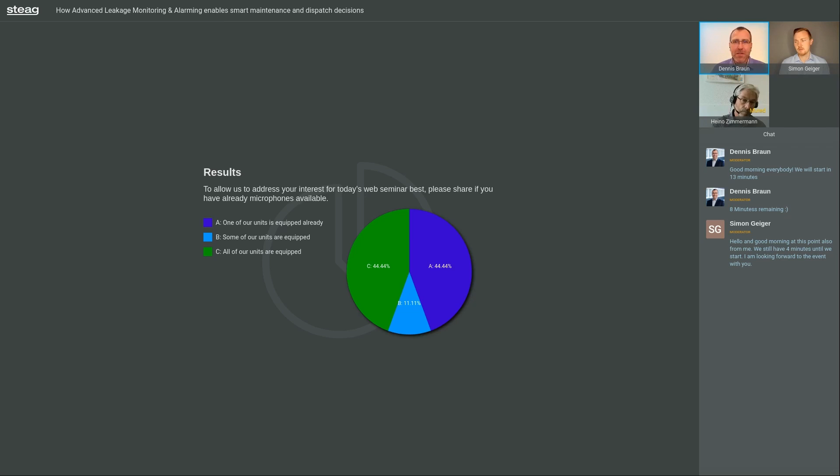So that is really an audience today that is really right in the focus. So let us go. Let us show you quickly what STEAG does, and then Heino can show us exactly what ALMA can do for you.

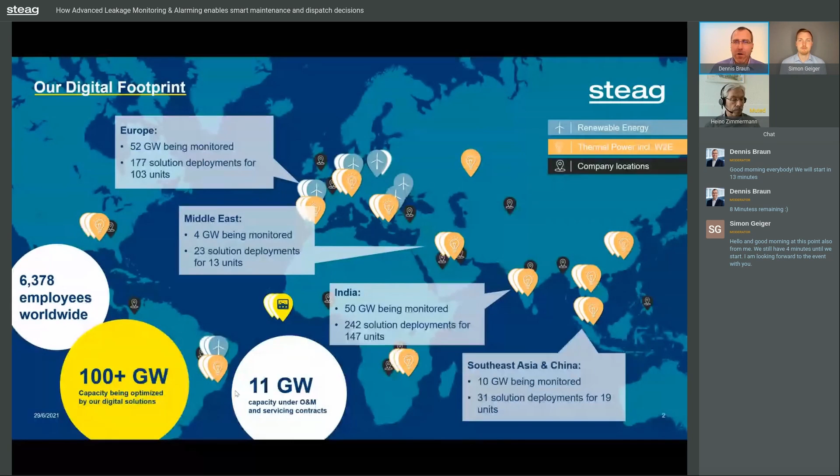Just a couple of numbers here, pretty quick. For example, the boiler cleaning management, which Heino is also responsible for, as we discussed a minute before, more than 66 gigawatts of power plant capacity are using that. Other modules we have are used in total in more than 20 countries around the world. So you see, it's not something new, not something we just invented yesterday. It's really well proven around the globe.

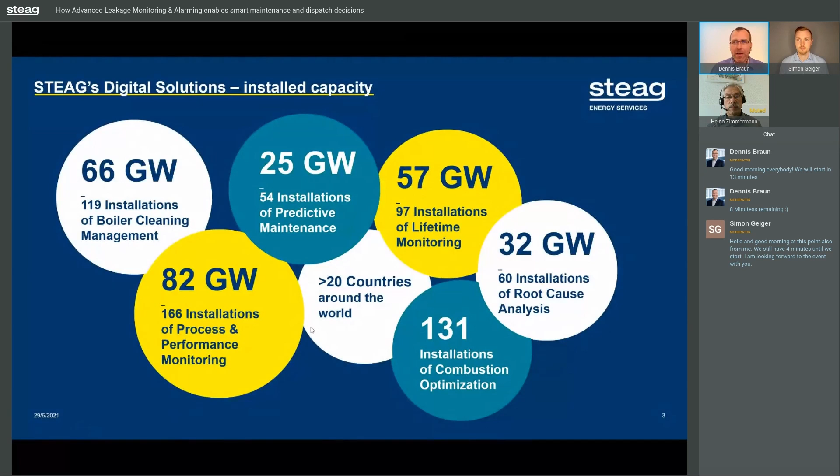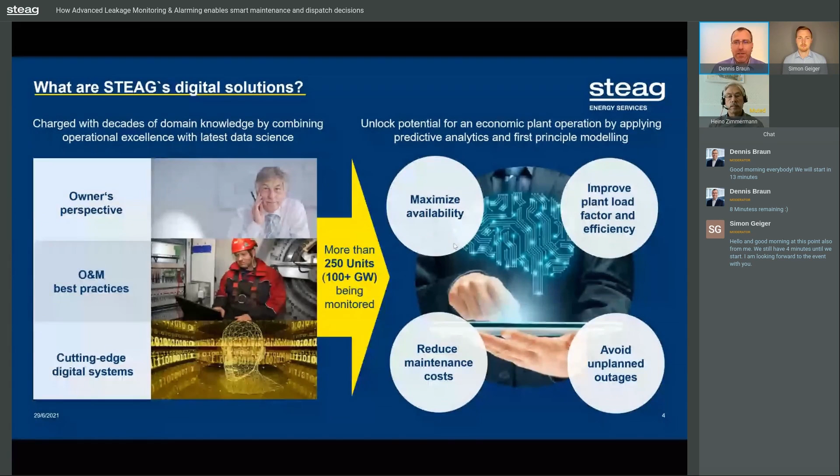So what are those things that I show you here? It's all part of STEAG's asset intelligence framework. So at the bottom, there's a couple of software products.

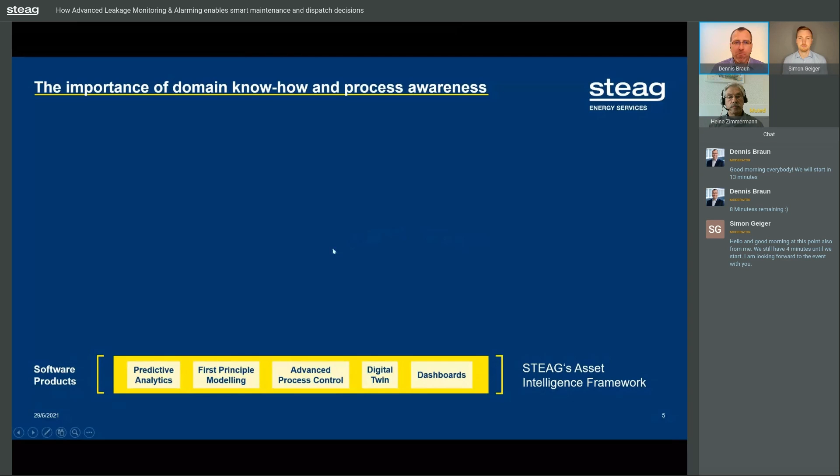We combine that with our and the customer's experience across different applications and different fields, from lifetime monitoring to operation, maintenance, and data science. It's all part of that asset intelligence framework.

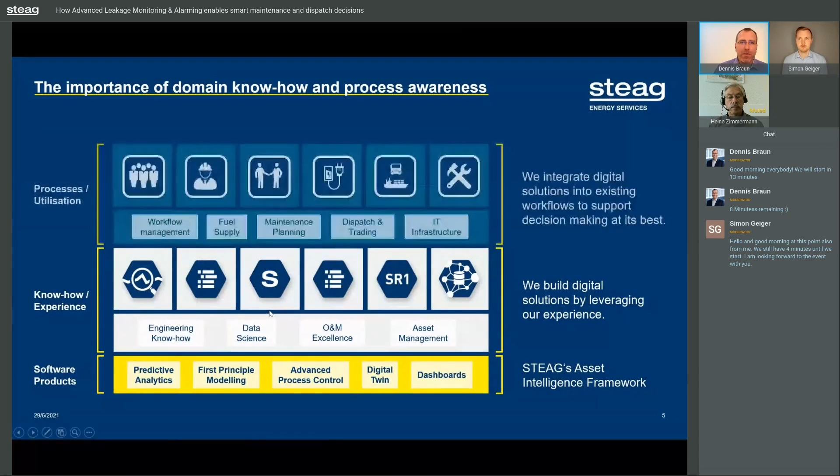But then comes maybe the most important part: to really have the knowledge how to put that into the daily work of our customers and partners, to allow insights to be turned into actions. It's not about a screen that is just showing something. It's about the people on site being able to do the right thing for the highest benefit of the owner and operator.

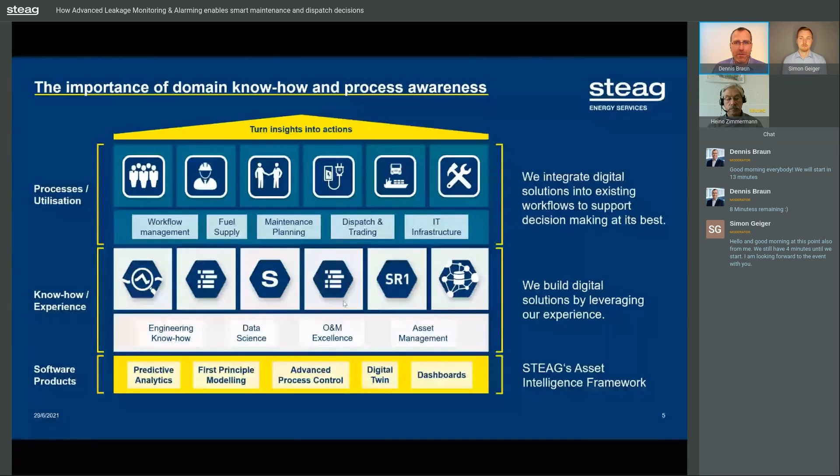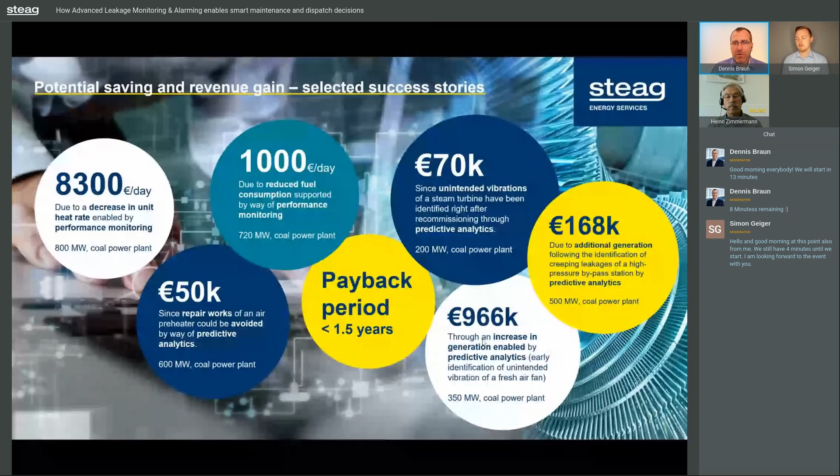Here's an invitation for you. First of all, of course, our next webinars and our Energy Week in November, but also if you today think ALMA sounds good but you're still not sure if it fits your unit, the technology that you apply, you are invited to contact Heino, Simon, or me, and we can later see with your data, with your question, if that fits—and many times it does. I think it's really worth having a private meeting afterwards online to find out if it makes sense for you and helps you have those benefits that many other customers already use.

Before we finish this introduction, I'd like to share only 2 slides to quickly show what ALMA is. The abbreviation stands for Advanced Leakage Monitoring and Alerting. It's an IT solution for detecting leakages in the steam generator, a system that gives early and reliable notification to operators that something is wrong. It's an add-on to acoustic sensor systems, and it connects via an interface to those other systems, as we will see with Heino soon. It's able to detect leakages first.

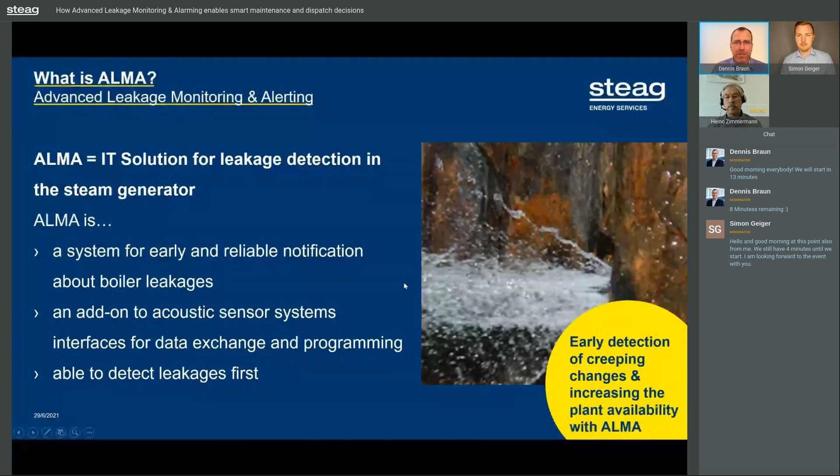Of course, there are different possibilities to detect leakages, and Heino will go into those details soon. But for us, it's important to give early and reliable information that something is wrong. We see here the pipe water coming out, for those who haven't seen that or don't have a feeling for what I mean. So this is one example to show you what this knowledge can do for you, and then my part is over and Heino can take over.

We talk about this—yes, please. Dennis, please, can I interrupt you for a short second? There are some questions coming about problems with people not being able to hear us. Maybe you can give me or us short feedback in the chat if you can hear us at the moment or if you have problems.

Please let me know. I also recommend doing a refresh, F5, on your browser. I can see on one client it's all fine; on the other, I still don't have the slides coming through, so I'll refresh here too. You can also copy the URL from the top of your screen, reopen your browser, and jump right back in—that should also help. But it's good that you let us know if something's wrong. I think that's very nice.

It's only browser-based here, but on the other hand, a full software installation is sometimes a little more stable. Since we have power plant customers, in many cases local installations are typically not possible for our audience, so we went for something completely without any software installation. Good, let me also refresh here. Let me get my mouse. Good.

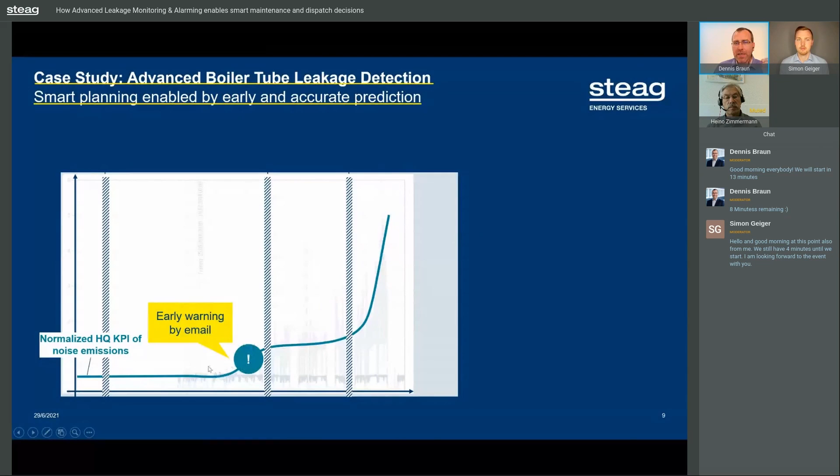The leakage starts pretty small, and it's very difficult to detect. But in this case, our ALMA, since it's so precise, gives a warning with an email, so you are aware. So you focus, you check how bad it is. And since the leakage is not so bad, repairs can be postponed.

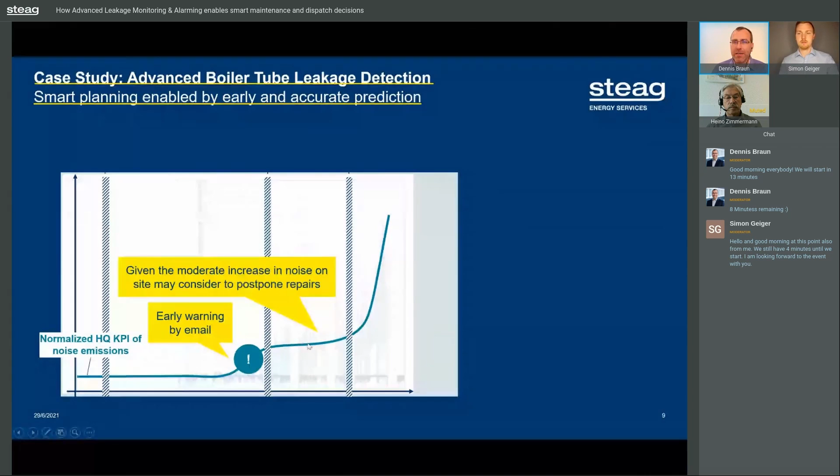You didn't make it here for the first standstill, it was too short notice, but you can go maybe like a week of time here. You can go a couple of days keeping an eye on the issue, but it's not a problem yet. So you schedule maintenance, and here it breaks, and here those consequential damages were avoided since you have the knowledge and you can fix it before with a planned standstill.

What that means in detail we will see with Heino, but that is just the big message here. You can use that knowledge to avoid unplanned outages, and that's very valuable. And you saw those numbers, what that could mean easily - lots of money. So that is very helpful. Good, so that was my quick overview.

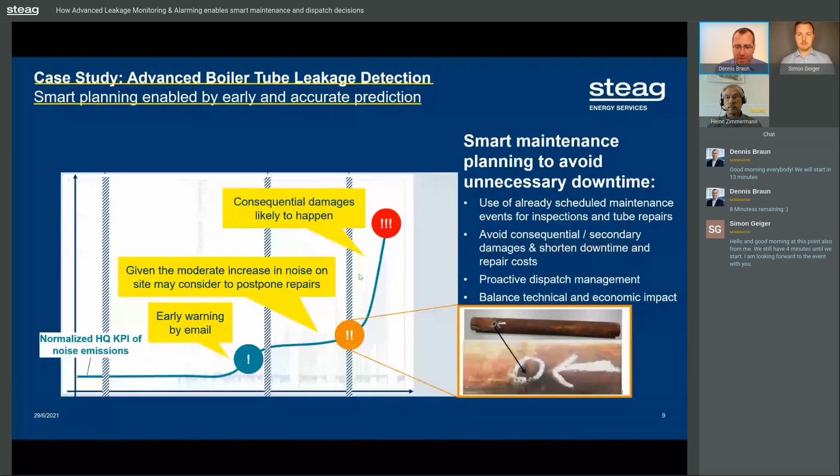Good, so Simon, Heino, was there anything to add? Oh, I hear somebody cannot hear me. It's really problematic today. Okay, maybe Heino will take over. I will push F5 here, and hopefully everything is better then. So let's continue with the next part. Heino, the stage is yours.

Thank you very much for your good introduction. I hope my sound is good, and I will start sharing my screen. If everything is set up right, then I'll start with my presentation. It's about ALMA, as Dennis already introduced, and I will talk a little bit about boiler leakage in general to provide some background, and then I will explain how ALMA works and how early detection is implemented. At the end, I will give a few examples, and we can have a look at a real ALMA system, what it looks like, and how to use it.

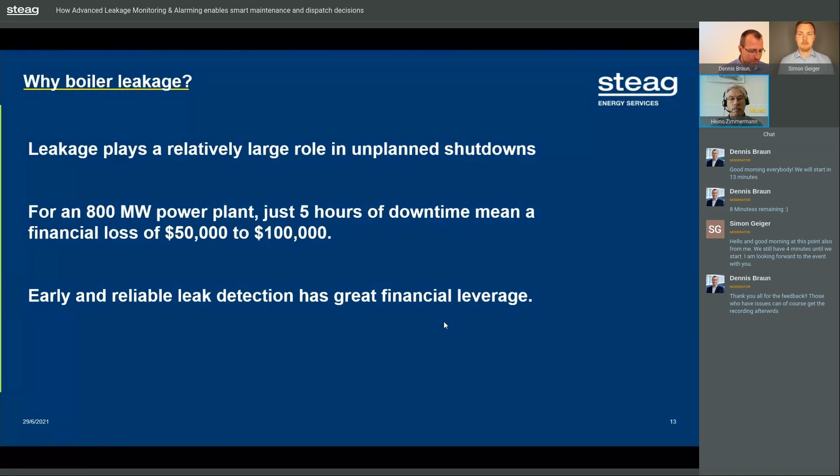Leakages and unplanned shutdowns are pretty expensive. Just an example of an 800 megawatt power plant: just 5 hours of downtime means financial loss of about $50,000 up to $100,000, and I'm sure that is the lower part of the range of the cost. Because of this high financial loss from downtime, early and reliable leak detection would have a great financial leverage. If we get a way to detect leaks very early after they come up, we would get a lot of time to react, to plan the maintenance and repair, and save a lot of money.

We should have a look at the causes of boiler tube leakages, because if we want to detect something, we should know how it occurs, how it works. Erosion is a big topic with tube leakages. It mainly comes from soot blowing and from the ashes in the coal that erode the tubes in the boiler in the flue gas path. Thermal stress also plays a role. During startup and shutdown, there are big temperature gradients, and those cause stress on the tubes, and mainly weldings get stressed.

Weldings tend to break during shutdown or startup. Chemical corrosion also occurs when there's a lack of O2 close to the burners. Then CO corrosion can affect the furnace walls and cause damage.

And last, and perhaps the most important cause for leakages, are leakages. That's not a mistake - it is the fact that many leakages cause secondary or subsequent leakages. You can imagine steam or water under high pressure getting out of a small leak or hole can cut neighboring tubes, and this is what we call secondary leakages. This is a big issue, and these secondary leakages of course grow and get worse the more time it takes from the start of the leak until shutdown for repairing it.

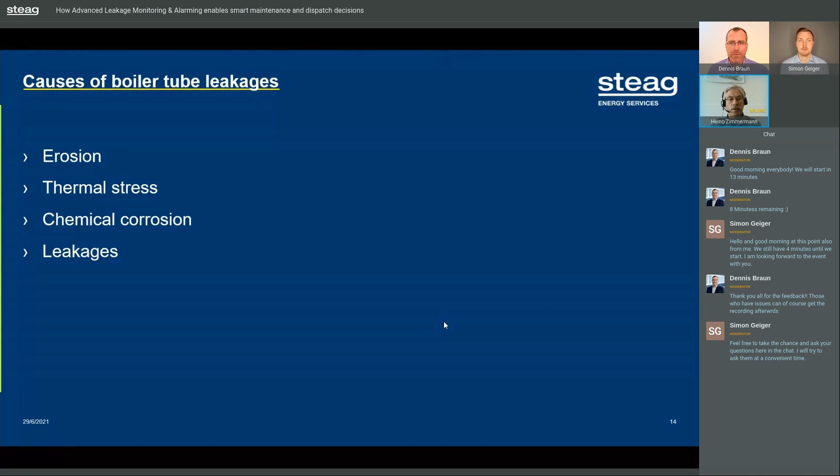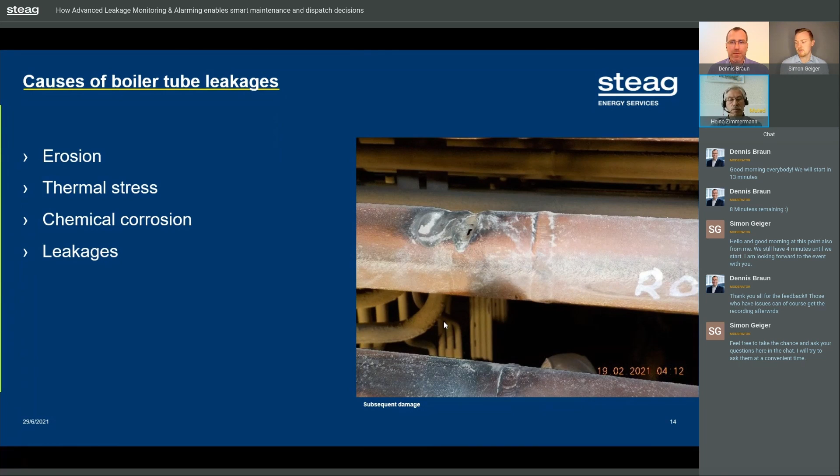Maybe that's a good moment to ask the audience a question, since we prepared exactly that. How many leakages do you have per year? Those that know, give us a feeling. Very often, very rare, not at all, more than 10? Okay, I will share the results. Thank you all. Wow, no one, good. Maybe another question to finish here so we don't interrupt again soon.

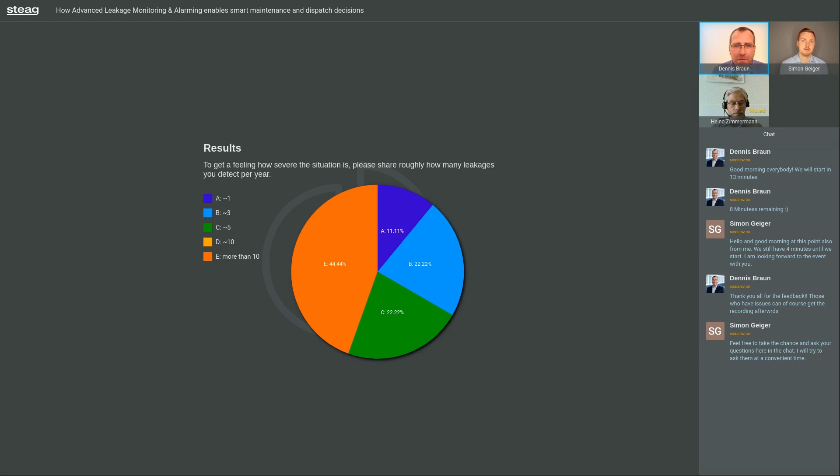I'm done, thank you for the confirmation of all the participants. It's very interesting to learn how frequent secondary leakages are, and also how many microphones are installed. That's very interesting for me, so thank you for that.

So we stopped at the causes of boiler tube leakages, and of course the question is how to reduce loss caused by the leakages. There are two approaches. The first is to avoid leakages at all, and the second is, if there is a leak, to reduce the cost of that leakage. Avoiding leakages is possible by optimized soot blowing, so less soot blowing, and only where it's really necessary due to fouling or slagging on a heating surface, which will reduce the erosion caused by the steam and by ashes moving upstream through the boiler.

The second approach, addressing CO corrosion, can be combustion optimization by leading the combustion air in a better way to avoid this CO corrosion. Heino, I think it's worth mentioning we can provide that as well, right? This is not part of the ALMA package, but it's part of what we do, so if somebody has a problem there, they can reach out and we can have a project or discussion about that with them as well.

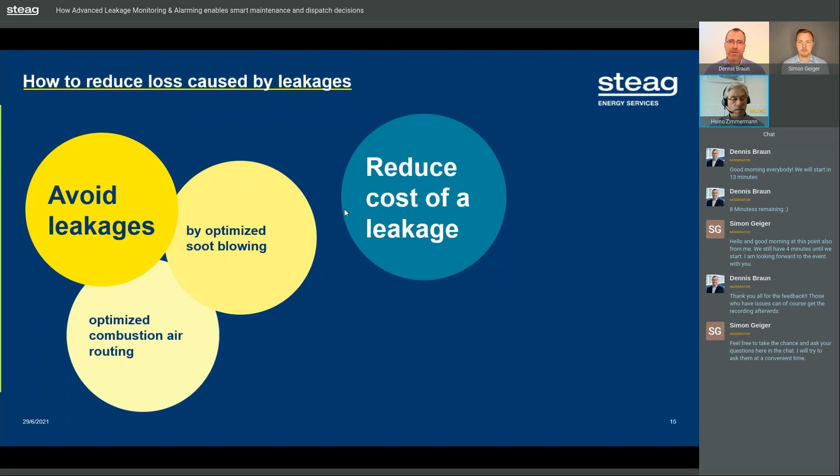Both topics are pretty interesting, but today we don't have time to address everything regarding leakage. So we will focus on early detection and reliable alerts to reduce the cost of an existing leak, and one task is to avoid subsequent damages. In the case of slowly growing leaks, we can even convert an unplanned shutdown into a planned one. As you mentioned, Dennis, in your introduction, if you can avoid an unplanned shutdown of one, two, or three days, you can save a huge amount of money, and each system would be paid back with this one avoided shutdown.

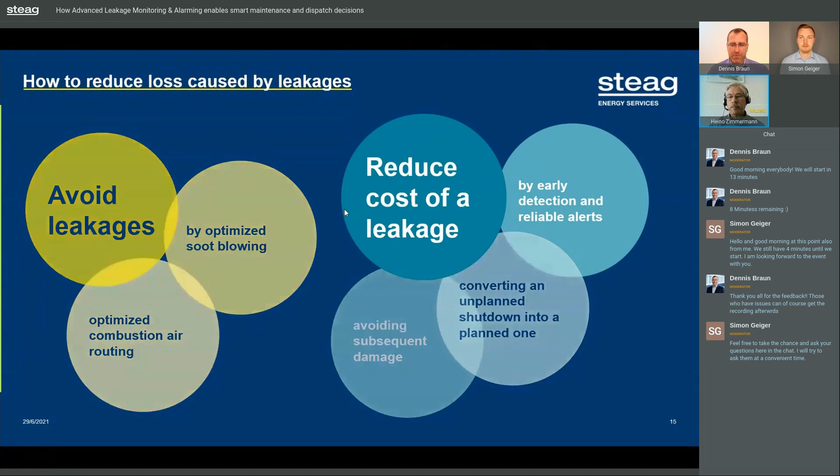So early detection, reliable alerts is our topic today. Let us go into detail on how leaks are detected today. There are some measurements in a plant with respect to water flow and steam flow that typically are used to detect leakages. The most important is the mass flow balance of water and steam. If we compare the feed water entering the boiler and the amount of steam leaving the boiler, an increasing difference is an indication of a leakage.

The same applies to the deaerator level. If there's a leak in the water-steam cycle, the water level will go down and the makeup water flow will increase to refill and replace that missing amount of water. These approaches do not apply to all leaks. For example, in the superheated steam area, this mass flow balance of feed water and live steam does not apply, and these criteria are pretty inaccurate.

Once you see a difference in the mass flow balance of water and steam, the leak is already pretty big and it's very urgent to act. So there's no early warning if you just watch these water-steam data. Similar data are available in the flue gas path. If water or steam enters the flue gas in the boiler, the flue gas temperature is affected, and furnace pressure can change, but these indicators are also pretty inaccurate and come very late if a leak has made big progress.

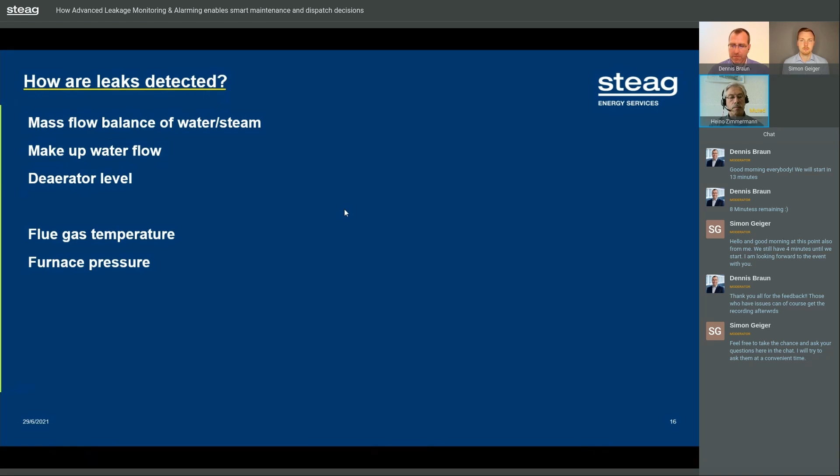The best we have today are acoustic sensors, microphones that listen to the noise in the boiler. If there's steam passing through a tiny hole, or high pressure water passing through a tiny hole, that makes a lot of noise. The microphones used as acoustic sensors are listening into the boiler and detecting any kind of noise.

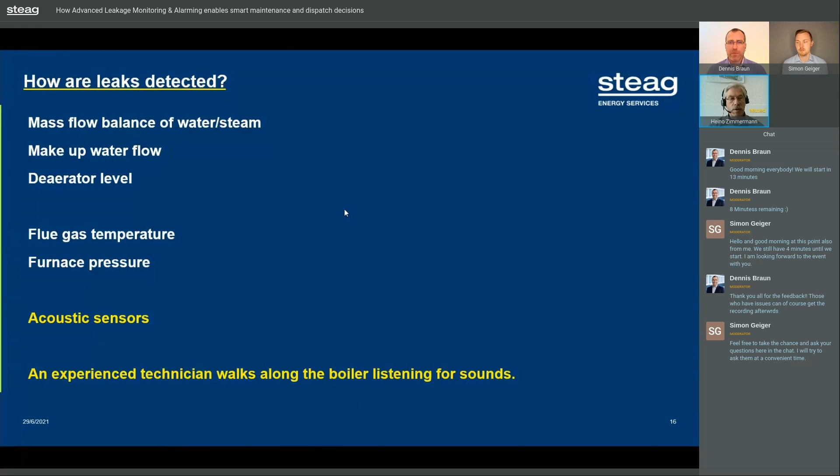And last but not least, of course, the experienced technician who walks along the boiler listening for sounds is the most reliable source, unless you have ALMA. But ALMA is on duty 24/7, and I hope that most people don't have to work that much.

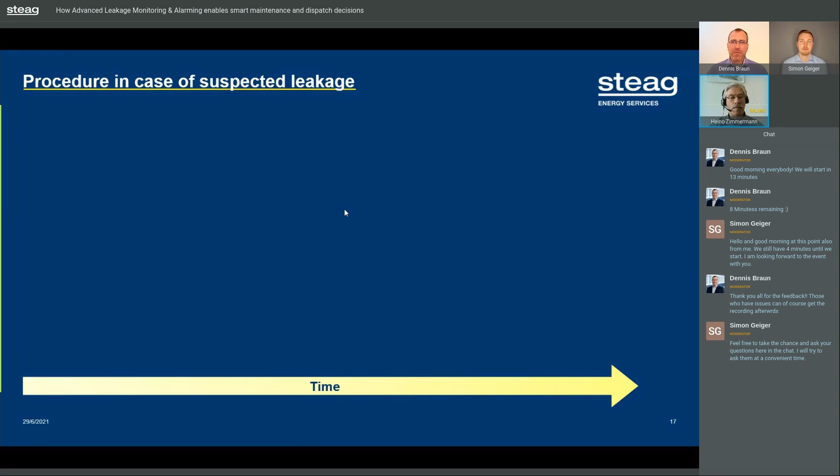So the goal is to early detect and to reliably detect, so we want to save time. That's why we now have a look at the process and the time axis, what is going on if there's a leak. When a leakage starts or begins, some time passes until it is noticed, or until the first suspicion about a leak arises. During this time, the leak can grow and can already start cutting neighboring tubes.

So once there is a suspicion about a leak, a cross-check is typically necessary. Other data are taken into account and discussions in the control room start whether that indication of a leak is pointing to a real leak or some false alarm, and maybe finally some operator is sent to the boiler to go by himself and listen. And all this should lead to the decision whether to shut down the boiler or not. This is the most important decision, and because it is very costly, it has to be taken carefully.

ALMA addresses both phases: from the beginning of the leakage until the first suspicion, this is the early alarming part, and the second phase, cross-checking the suspicion, is the part that ALMA covers with respect to reliable alarming. The more reliable my first suspicion is, the shorter the time can be until I can shut down the boiler.

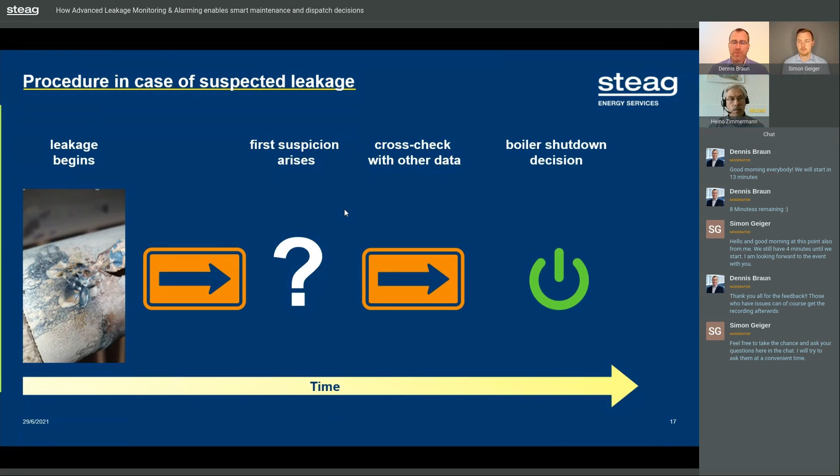So there are acoustic sensor systems installed, many of them, as we learned in the survey here. Let me give a few explanations of how these systems work for those who don't have it installed.

There are microphones, sound sensors installed outside the boiler because they are sensitive to high temperatures, and they listen, as I explained, to the noise in the boiler, either through the air—there's a tiny tube leading into the boiler so the microphone can directly get the sound from inside—or there are sensors getting the sound emitted by the structure of the boiler, especially in the section of water walls where we don't want to penetrate the wall. These structure-borne sensors are installed. Typically, up to 30 sound sensors are installed in a boiler.

Then there's some cabling to connect everything with an evaluation computer, and this evaluation computer brings together all the signals and performs some kind of evaluation, filtering, and so on. On the right, we see an example of such an output, and what we see is some red areas, some yellow hints, some green, and some blue. All of it is connected to a constant alarming level.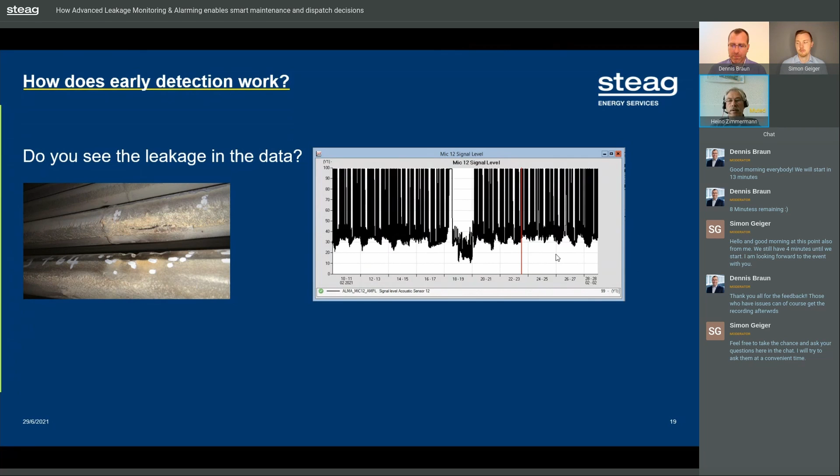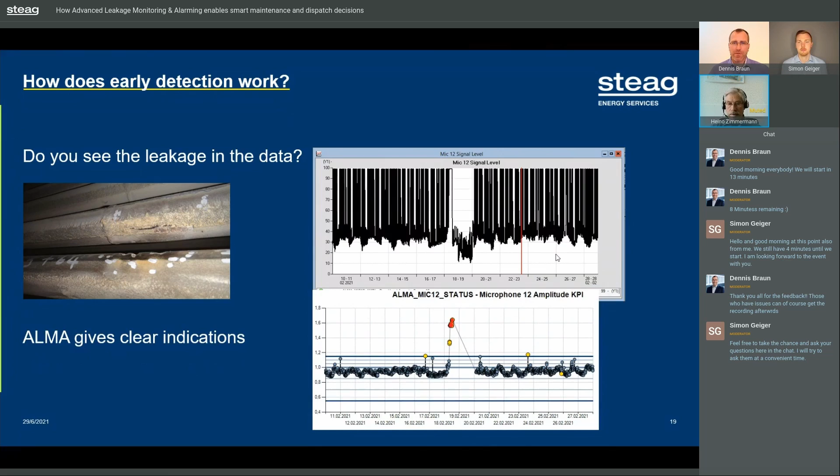But there's a way, of course. ALMA can process this data to give clear indications based on this scattered signal. And this processing of data we call advanced analytics. Now I'll explain how that works.

We apply it in the online system, in the ALMA system, and the first step during the online evaluation is to compare the current actual values of each individual microphone with its respective expected values. The light blue lines on the right screen are the actual data, and the dark blue is coming from the neural network. For that current operation mode, we expect some different noise. It's a first indication, but you see there's still much scattering and fluctuation, and the quality is not much better than before.

Next step will be normalizing the data by calculating the ratio of the actual value and the expected value. The result is an indicator, a performance indicator as it's called in data science, which is around 1. If the value is exactly 1, the actual behavior matches the expected value perfectly. If it's different from 1, there's some deviation. What we get by this normalized data is an independence from load, from mill combination, and so on. So it's a first step to generalize the data.

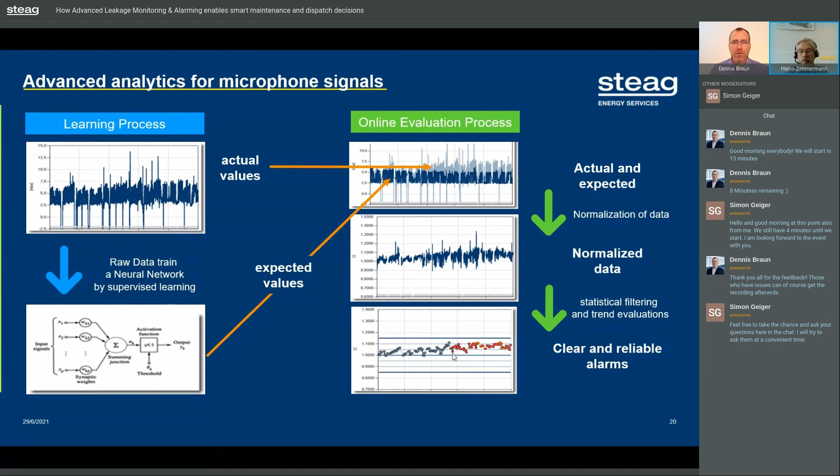Let me give one example from... well, I just read that some people are having issues today. I'm not sure what's wrong. I think there were a couple of updates to the system we are using here two weeks ago. Those that are still here hopefully have no problems. If anything, refresh or even restart your browser. Those that get kicked out for any reason, we will make sure to distribute the recording soon. If you have more questions you cannot ask today, send us an email and we will include that afterwards. So some people say everything's fine, others say they cannot reconnect, which is strange. I will make sure to talk to the company afterwards to find out what's wrong today. That's a pity, but we will be available for later questions and feedback. Some say everything's fine and others cannot reconnect. That is crazy, but we are good.

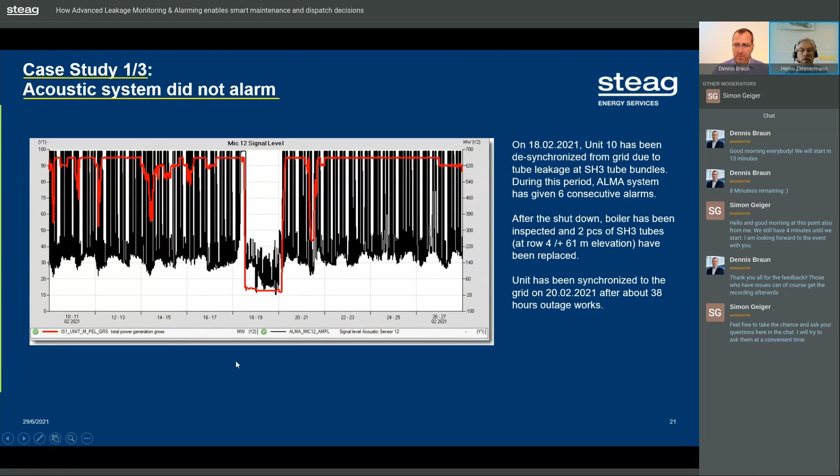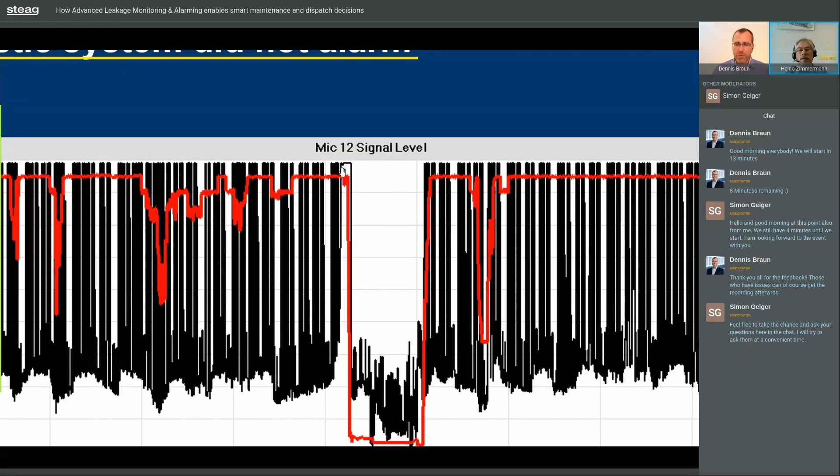Here we see a violent leak, and the red line is the power generation of that unit we have a look at, and we see the shutdown in the center. The characteristics are very difficult to analyze. Let me have a closer look. Only thing we can see here is this area, where the signal is a little bit different. We can see here that the leak started on the left corner of that bar.

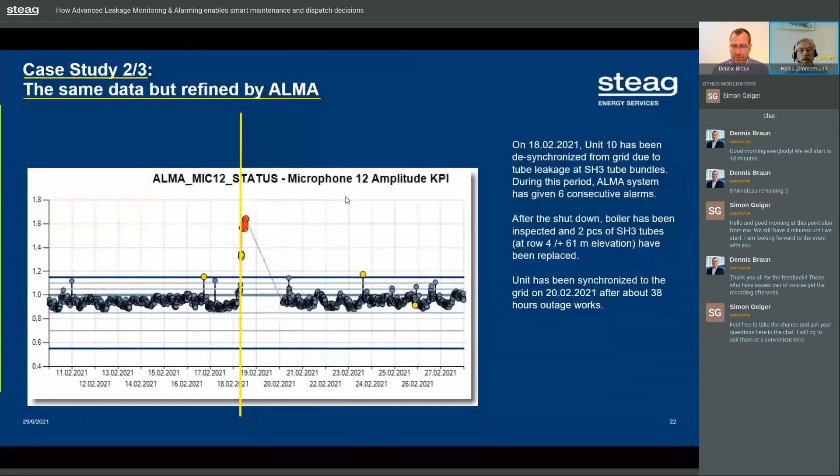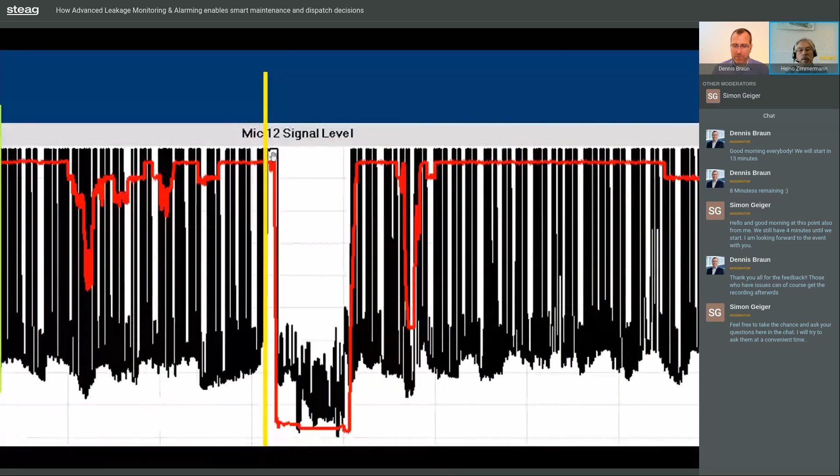That's the same event, same data, just processed by ALMA, and you already saw this, and we see the clear indication. If we compare the point in time of ALMA's first alert and the leakage, we can see that it was at the very beginning of that period where we have that loud noise. So that's the earliest point in time where a violent leak can be detected.

On the right, we have some comment from the operator about this leakage. What I would like to mention is it took about 38 hours to repair this leak. That's a good job, considering that you have to cool down the boiler, find the leak, cut the tubes and weld new tubes. But it is 38 hours, and if you remember the financial loss of a few hours, then this 38 hours...

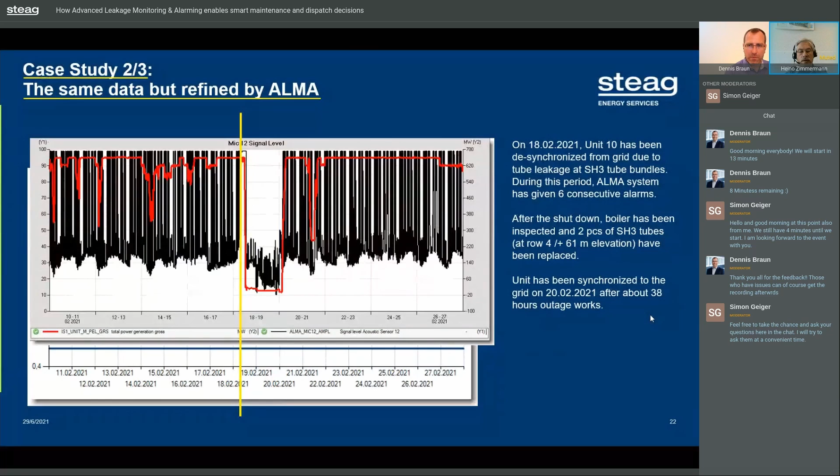Represents 300, 400, 500,000 US dollars of financial loss. And I think you can agree, if we can shorten these downtimes by avoiding secondary leaks and subsequent leaks, only one or two times a year, only a few hours, then we would be able to save a lot of money.

The operators, of course, do not have to monitor these ugly trends of the sound signals or ALMA status signals all the time. They get an email notification each time one microphone changes its state to an alert state. This email can be sent to different groups of recipients - technicians, performance engineers, operators, as the process in the plant requires - and it contains the most important information to make the first decisions. There are four diagrams included. I will show it when we are on the demo system, and it is the basis for the first decisions.

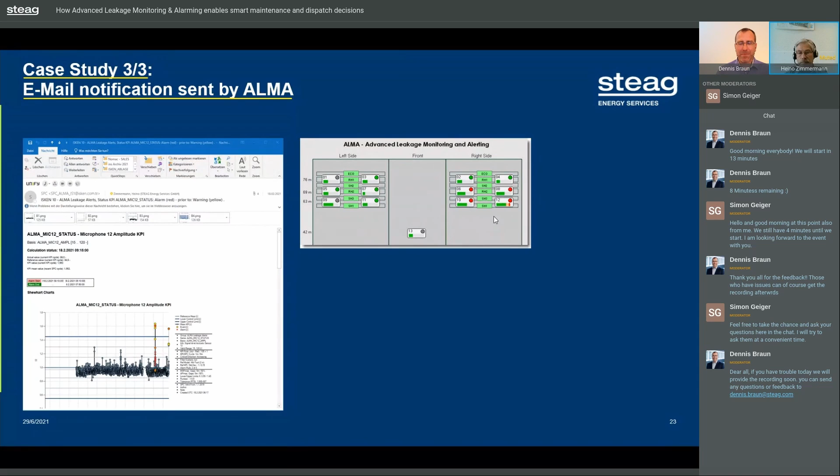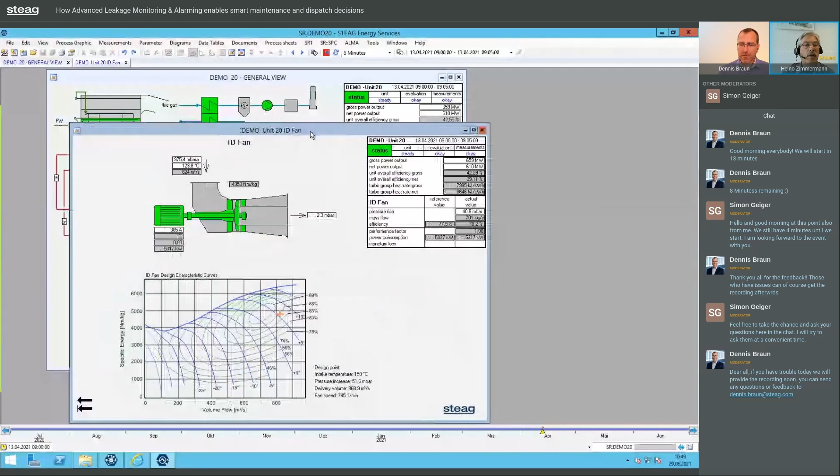Here it is, hope you can see it all. We see the visualization of our system, and we've used this same visualization for our performance monitoring, for our optimized soot blowing. It is a view on our data historian that keeps measurement data. We show it in white fields, and calculation results are in gray fields of our modules installed. You can go into detail with other screens, you can open diagrams, so it is perfect for later analysis of events and of things that happen.

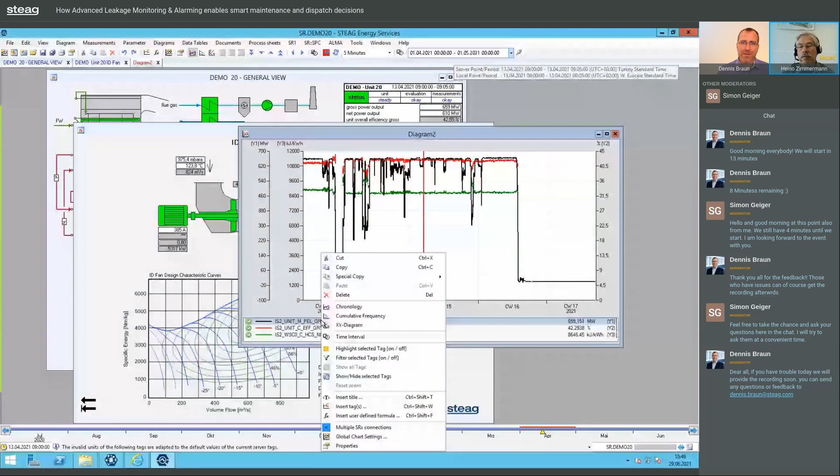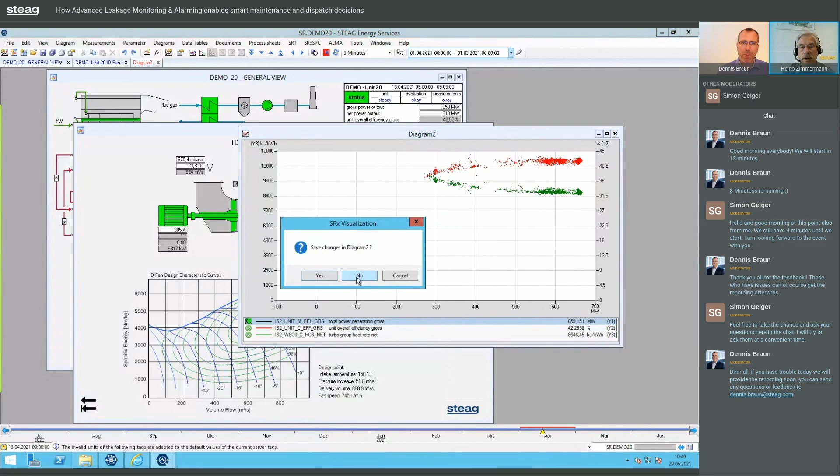Just let me put some data in it. I want to see one month of data, and I can examine data, for example, trends of characteristic curves and so on, very easily, very quickly. Okay, but this is not ALMA, so let's remove it.

For ALMA there's a separate view. This is an overview of all the sensors installed. In this case we have 14 microphones in the boiler. We see the location where it is, and we see the heating surfaces to have an orientation. And we already mentioned soot blowing - if a soot blowing is going on, then that specific heating surface is marked in blue color.

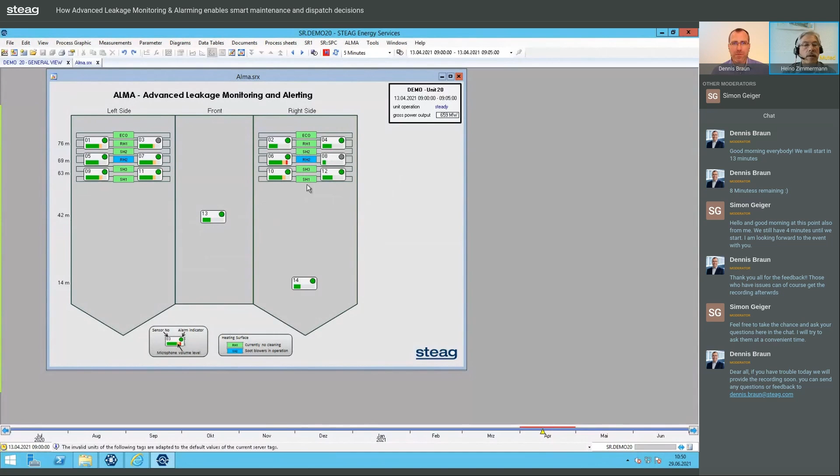And the example I want to show you happened in December, so I switch to data from December. Speed up a little bit right now before Dennis gets too nervous. It's very kind of you, Heino. No problem, no problem. So we see red, the generator output, and in black, one microphone's raw signal.

I want to show you this shutdown, this maintenance shutdown, repair shutdown, at the beginning of December last year. So let's go more into detail. One week, we see here it is shut down, and right before the boiler was shut down, we see a lot of red dots, which means different alarms by ALMA. We see this bar representing the volume of the microphone sensor at very high values in different areas of the boiler. So this is a clear indication of a big leak right now.

If we have a look at the noise level, we see a slow increase at this microphone number 12. We see the alarm started maybe one day. So we have one week here on the time axis, one day before it got really urgent and the boiler was shut down. But this is only one microphone.

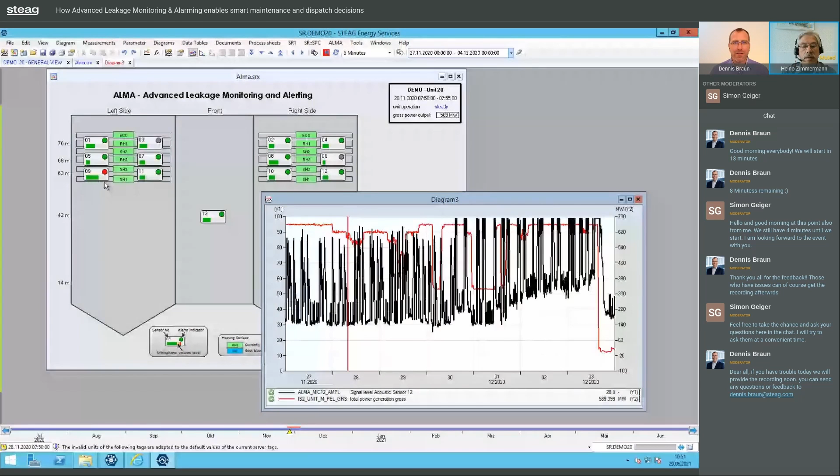Let's go back in time, six days back. Still one sensor is giving an alert. And what I want to do is add the signal of this microphone.

And what we see, up to the 27th of November we had a regular pattern, so to speak, and starting on the 27th, slowly increasing in the lower limit of the volume. On the 27th, late night, the first alarm was given by this sensor. And if you check, here we have the shutdown - it was six days before the shutdown happened.

So the operator had a lot of time to prepare and to evaluate, because he noticed, okay, it's a slow increasing leakage, I have some time, I try to plan my shutdown. He tried to plan, but he waited too long in this case, because he wanted to reach the following weekend, but that did not work. But at least he had enough time to schedule all the work, to prepare the material, and to shorten that outage a lot.

And Heino, you said it's difficult to make this decision whether to shut down or not. I think if you provide even to your management this kind of a graph and say, well, that was last time, this is this time, that's why I propose it, I think everybody should have much more confidence in this kind of request to shut down or try to go on, right? Correct, that's a good point. Confidence is very important, and confidence grows with each leak that ALMA detects. So when it's the first detection of ALMA, you are very, very careful with your decision, but over time you will build up trust into the system and learn how to interpret all the data.

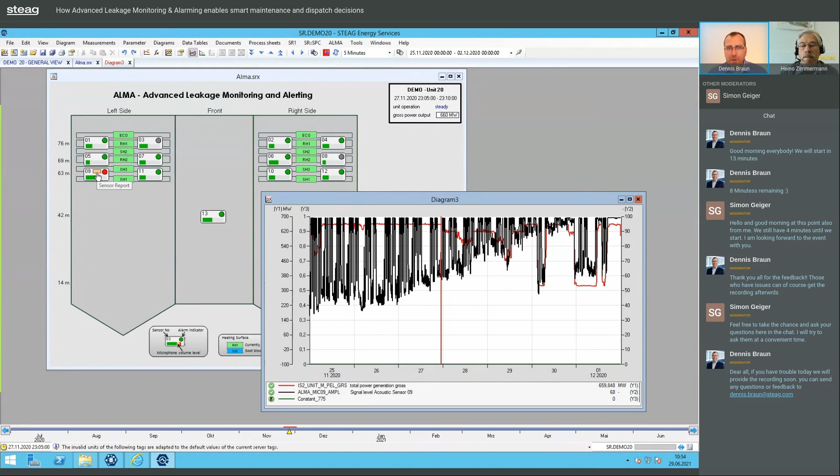Of course. The knowledge we collected over the past years in leakage detection is part of the engineering when we set up the system, and when we help to calibrate, repair, and work on the microphone sensors. Once this is done and the system is online, we are ready on a regular basis to review the system and give hints. And if the customer has a question, we are available all the time for this. You could, like we are right now, share the screen together, have a look together, and really exchange the knowledge that the customer has about the plant, that you have about the system.

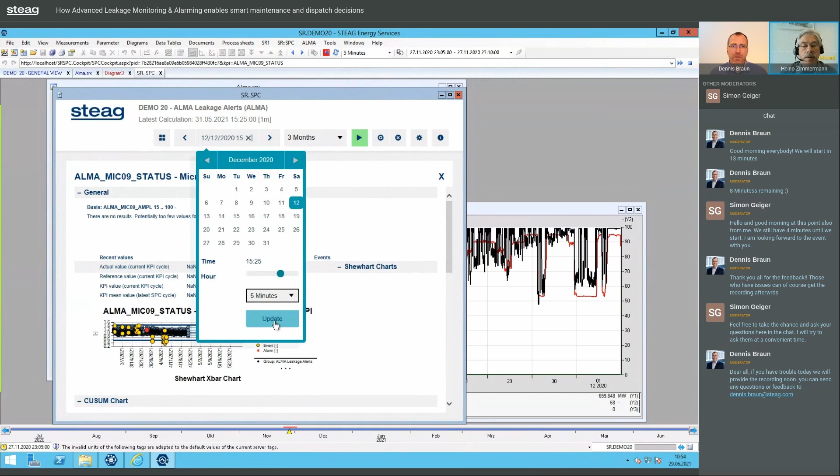I think this kind of confidence is the most relevant part, maybe, of the whole effort here. Yeah, correct. I would like to share another view similar to the view that is covered in the emails.

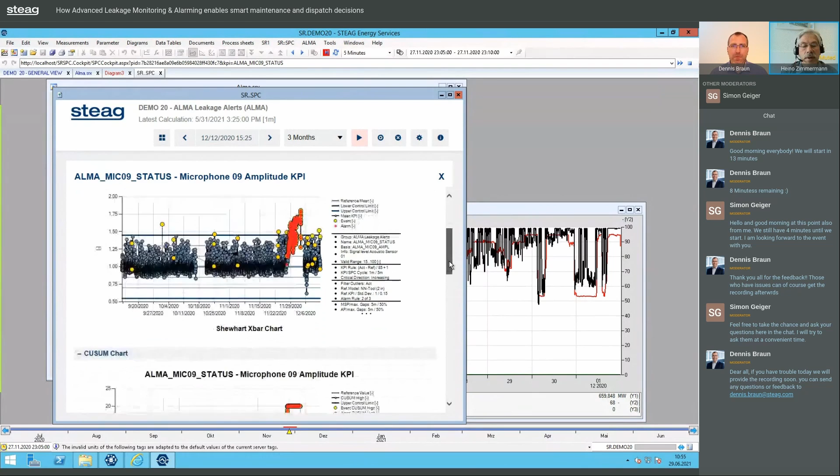So we have this clear indication when something turns red, then we have an alert. This is the 27th. Of course the customer gets this information when the first alert happens, not like here when 7 days have passed. So some additional expert diagrams and the chart showing the actual value, and in dark blue the reference value.

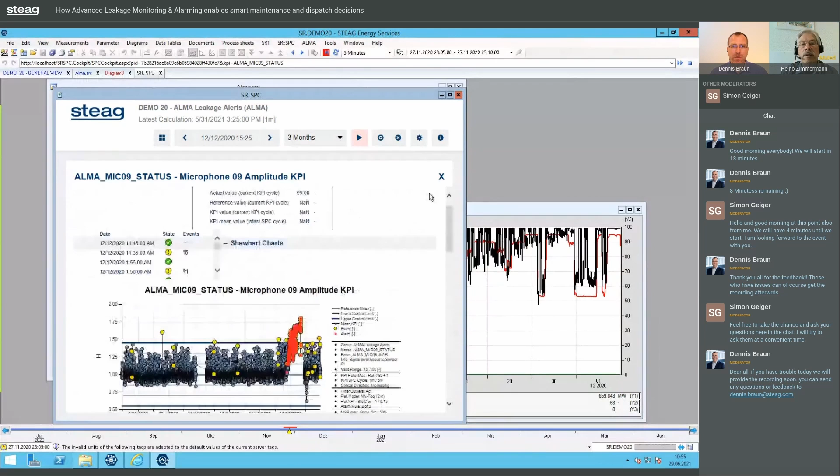And even some journal is there. If once a microphone has been calibrated, that might be important information in a retrospective. And you don't have to log into the system every day. You can just wait for those emails as well with the whole report.

Correct. Oh yeah, that's all nice. All I've shown here will be available in that email.

And you also can get an overview. This is also available in any web browser in your company's network if the IT routes this web page to your workstation. And you can see the overview of all microphones in one chart and see how the alerts develop. You see this microphone sensor 9 was first, and later on the others came up additionally, and finally here was the shutdown period to repair.

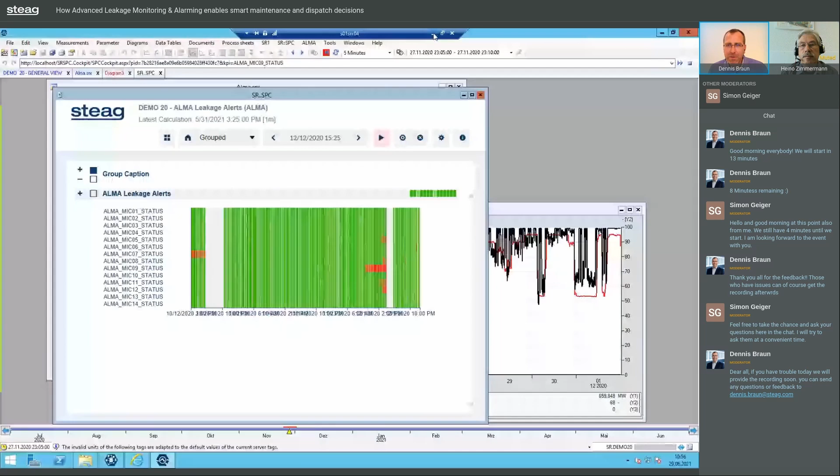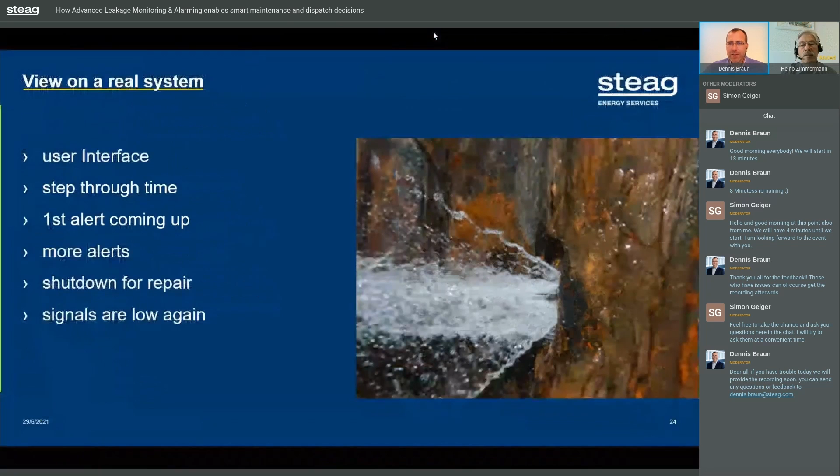I think that was a great example of how to use that advanced detection to have smart maintenance, to really decide what to do. Since we are coming to the end, maybe you could give from your experience the most relevant feedback you would like to share with your summary, and then if there are more questions you would like to send us, we can have them after 11 o'clock or even afterwards in smaller groups.

Okay, so I'll skip this nice example. There's some quotes of the users, but the summary, of course.

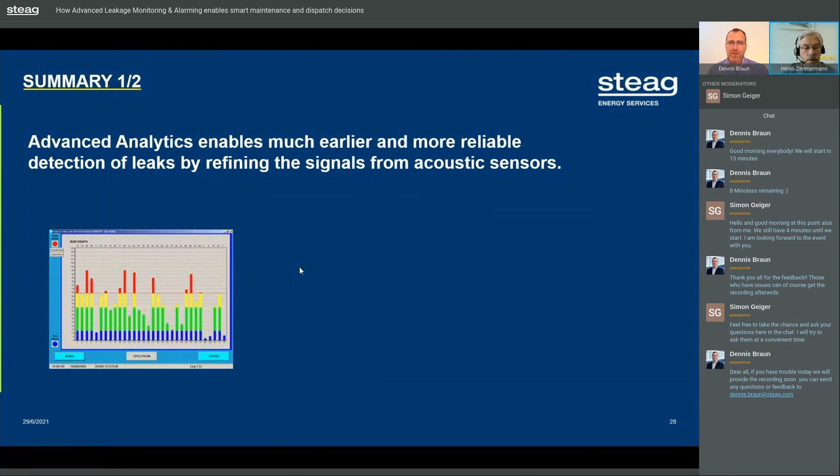Our advanced analytics, which is included in the ALMA system, helps us get information about leakages much earlier, especially if it is a slowly increasing leak, and much more reliably, so that we are able to make decisions on a better base and at an earlier point in time. Converting information like this into like this is what we do with ALMA, and that's what we like.

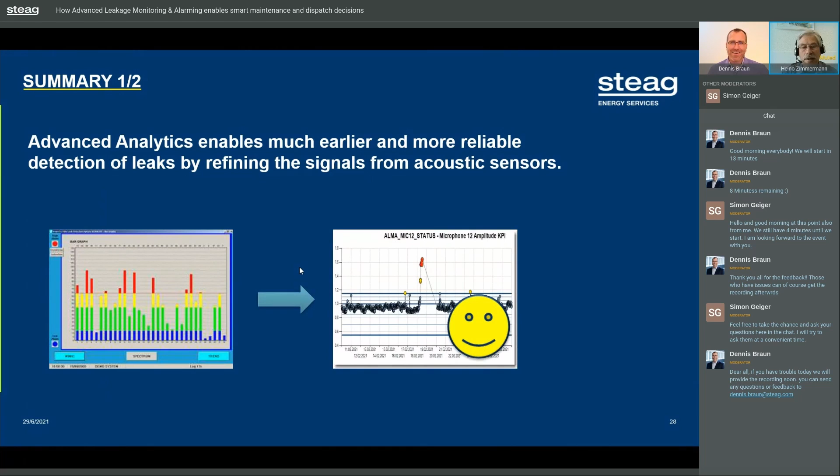Last page of the summary: accelerating the process of decision making regarding shutdown can help minimize subsequent damages, and that will help us minimize the financial loss caused by these downtimes.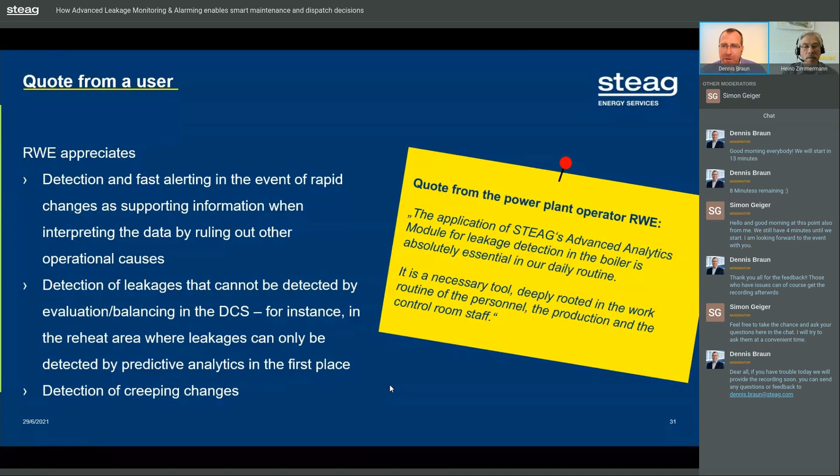Okay, good. So we have a little bit of time left, maybe one quick question we can have here. One question is about the calibration that is required to be carried out on the microphone. What is the maximum temperature that the microphone sensor can withstand?

Maybe let's go back to the camera view so we can finish here. Good, so tell us about the temperature fields that the microphones can see, and what about the calibration that's needed?

Yeah, temperatures, I'm not pretty sure, it is not too high. That's why the microphones are mounted outside the boiler and outside the insulation of the boiler. So there are tiny tubes leading into the boiler inside, and these tubes lead the noise to the microphones that are located outside. So temperature is an issue, but it is addressed by the way of mounting it and so on. Maybe more details can be provided by your local partners for those kinds of works on your boiler. They should know specifically what temperatures are permissible and what is not.

And calibration, of course, we need to adjust the dynamic range of each microphone individually to get the most information out of it. Typically, if the microphones are not maintained very frequently, some are always on the higher level of volume, showing the higher volume, and others do not show even the peaks because they are throttled down or less sensitive, and we have to adjust and calibrate all this together with the customer.